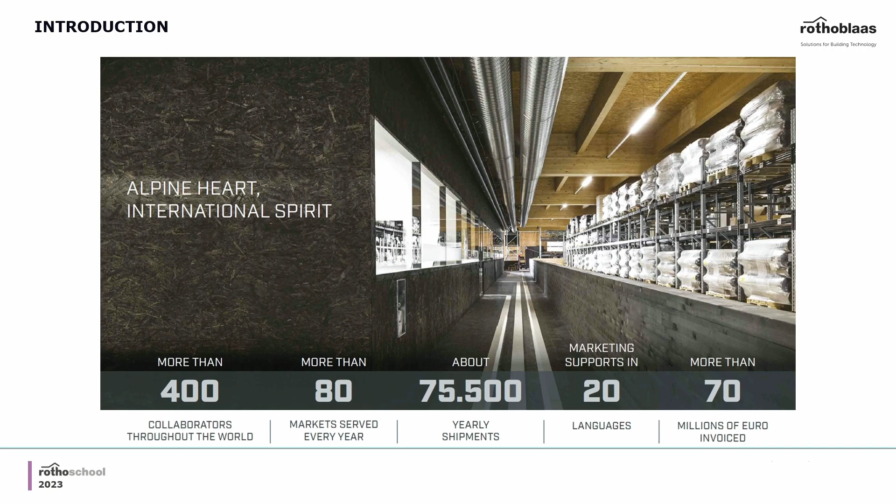As you can see here, we are more than 400 workers in Rothoblaas at the moment. Actually, we are almost 500 as we speak, because we keep on growing and growing. And as you can see here, but we're going to discuss more in detail also in the video lessons, this particular mass timber structure here, we just recently finished the construction of this massive and very nice automatic mass timber warehouse that we have here in our headquarters of Rothoblaas. And this will, and actually has already doubled the existing warehouse space that we have in Rothoblaas.

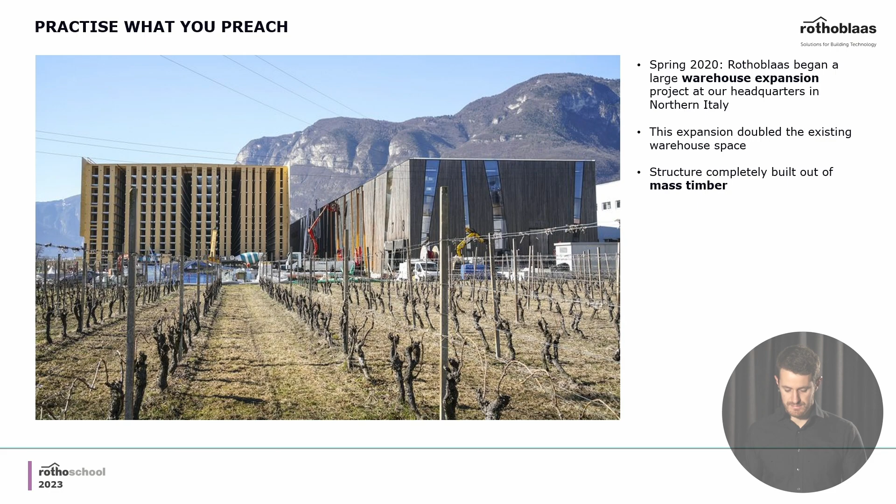So for us, it's practice what you preach. We preach with our Rothoschools around the world to use timber, and also for our own project, we use timber. The use of wood and of timber structure, of course, for us is very important for, as you all know, a sustainability point of view, very, very important. And this is why we preach also the use of this kind of material, structural material in this sense.

But of course, as you all know, timber is a material that a lot of people are passionate about, and myself, I'm the first one to be passionate about it. And second of all, it has a lot of very, very good structural characteristics that we'll see throughout the video lessons. And this is why a lot of people love timber, not only because of its beauty, but also because of sustainability and great performance, really.

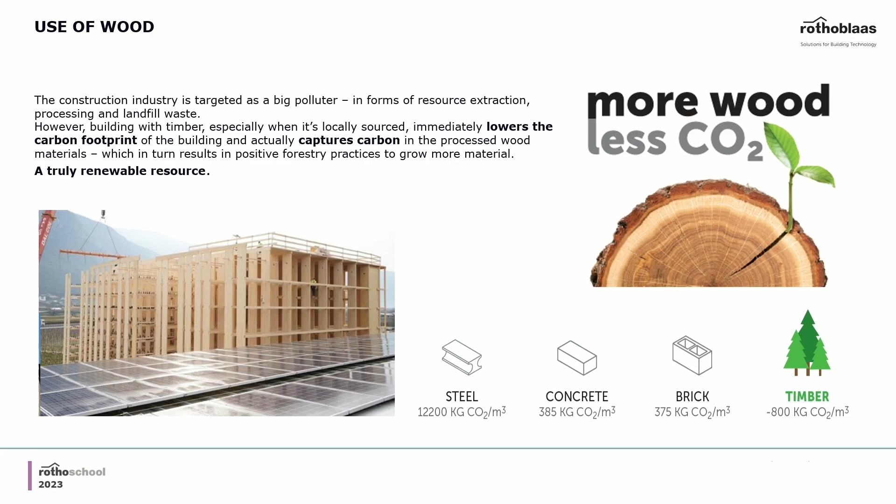What are these video lessons that we're going to do this year? There are 9 of them, actually. We start with the potential of CLT and mass timber, actually. Then we'll go for durability of timber structure and corrosion resistance for outdoor solutions, waterproofing and airtightness of timber structures, the acoustic in timber constructions, the fire design in timber structures, the seismic design, the composite structure or hybrid structure, a very hot topic nowadays to optimize the use of timber, the innovative connections for timber structures, and last but not least, the installation of fall arrest system.

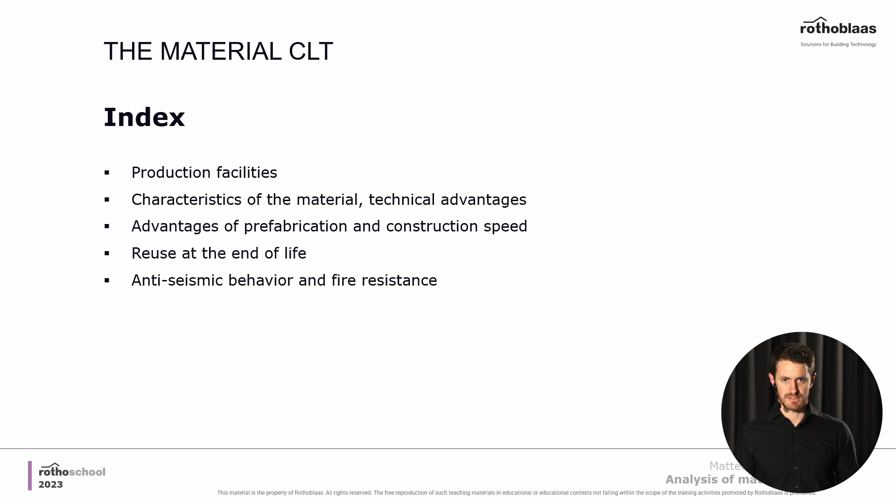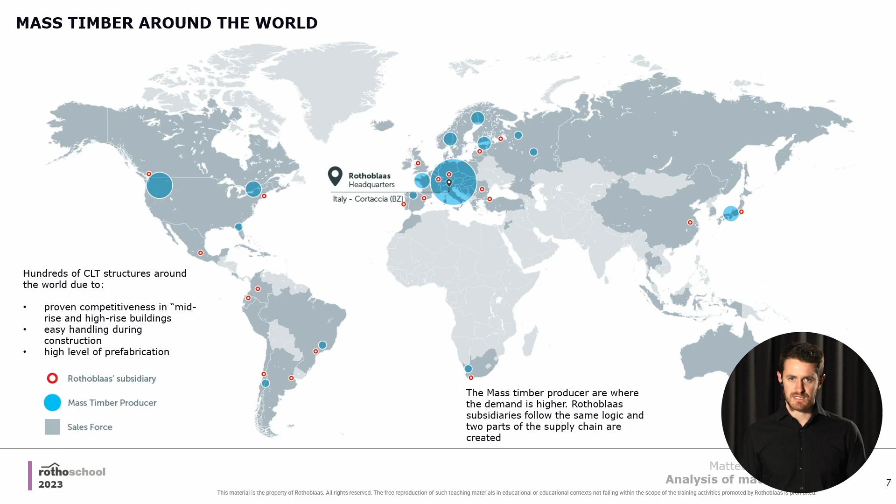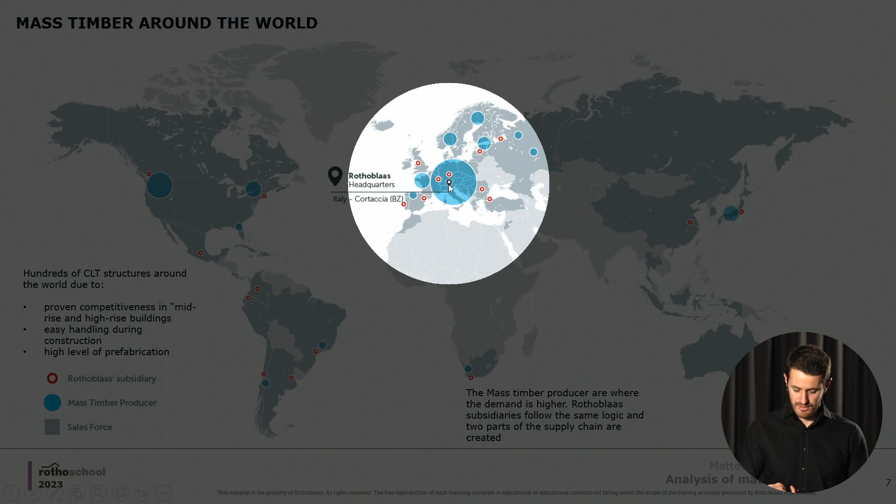First, as an introduction, you see where the mass timber producers are located around the world. The blue dots you see here are the CLT producers around the world. The little red dots are the subsidiaries of Rothoblaas. You see, of course, where I'm talking to you from at the moment, right here in the north of Italy - that's where the headquarters of Rothoblaas is. As you can see in the map, all of the subsidiaries of Rothoblaas are located very close to the CLT producers, which makes sense for both the producers and Rothoblaas, because we work together a lot.

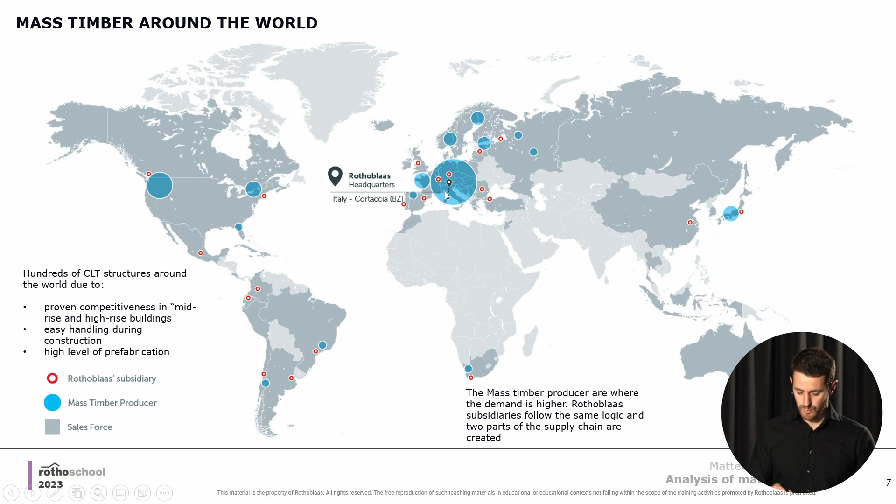You see from the map that one of the most important places where CLT was actually invented is Austria, north of Italy, Germany, Slovenia - all of the region I'm pointing to right now. So this is where a lot of know-how is located worldwide.

You see from this map here, and this is really the first advantage we will study together today, that timber structures are very lightweight. This will come in very handy for seismic actions, as we'll see throughout the presentation, but in particular it's very important because lightweight material means you can move it around and transport it quite easily. In fact, you see here all of the main directions of export and import of this material.

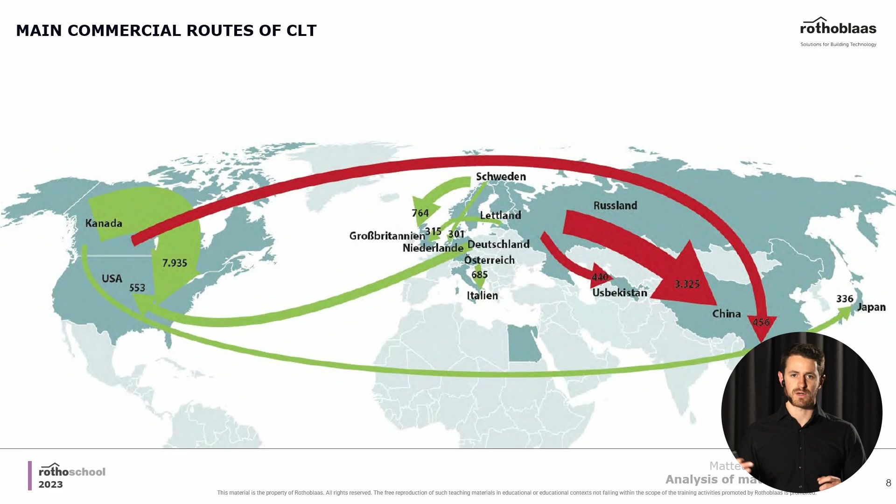It's very common nowadays that we design and produce timber structures here in the north of Italy, for example, and export them to the USA or to Australia or very faraway countries. This is something you can easily do with timber - you just place the panels into a container, ship it, and install it on the other side of the world. Another very important thing is the one you see in this slide right here.

You see in percentage what is the growth of use of every construction material. Timber, the red one, has increased so much after 2020. So it's a material that is more and more common, and studying it and knowing how to build with it is a great advantage, since we are planning to have still another increase in the following years.

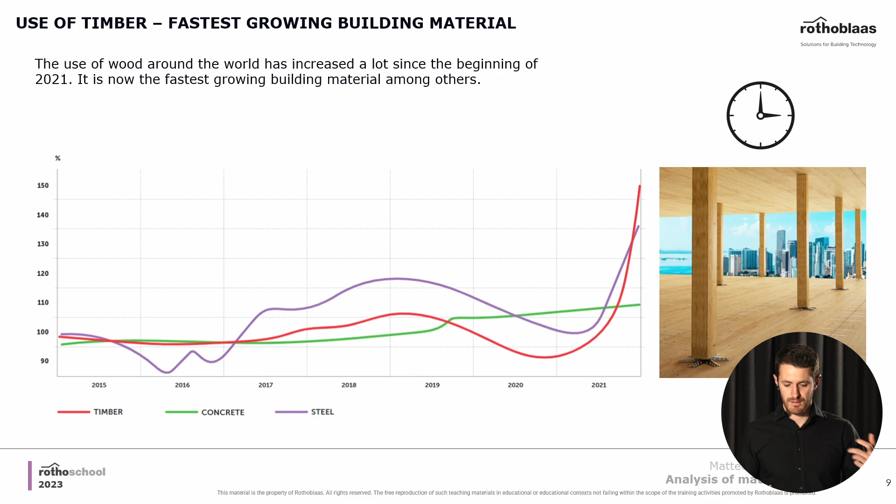Of course, other construction materials have grown a lot too, like steel, for example. Concrete is still growing, not so much, not exponentially like the others, but since a lot of foundations, even for timber buildings and steel constructions, are in concrete, it makes sense that all of them are actually following the same path, growing.

Another very good advantage you have with timber in general, not only mass timber in particular, is the possibility to prefabricate your buildings. Prefabrication means a few things: first, you can optimize your work. Second, you are very precise on site, and precision means you're not losing time or money on the construction site. Third, you can potentially produce these elements with a lower cost and higher precision - so you increase the quality and decrease the price.

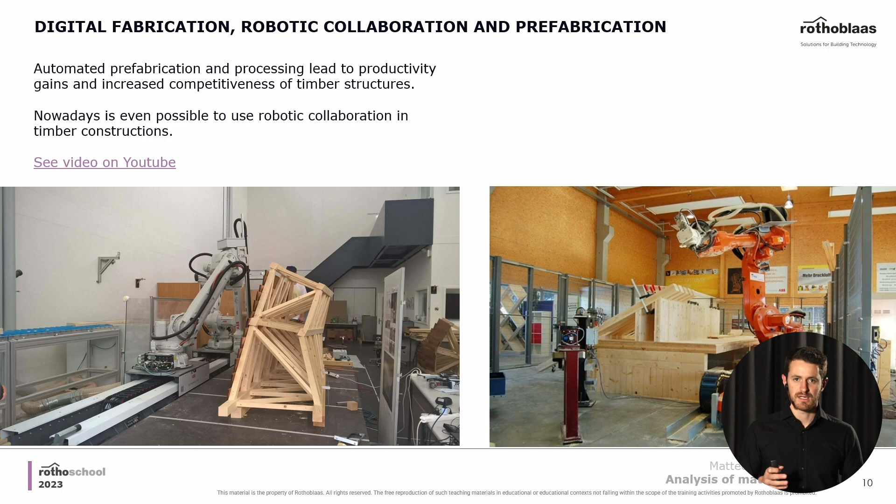So you see the robots in the image - this is something we'll definitely see in the future. But nowadays already, the machinery we're using to produce these amazing CLT structures includes already some advanced robots. They don't have arms and stuff like that, but they are still pretty advanced pieces of equipment. In the future, it's going to be possible to completely assemble a structure in the production facility thanks to these robots.

But even before talking about other advantages, how does the CLT panel work in general? From a technical point of view, it's easy to understand why CLT is called like that - it means cross-laminated timber.

As you can see from the image, it has layers in different directions. The most important thing is that the first layer is placed 90 degrees compared to the second one. With 90 degrees, I mean the angle between the grain direction, between one layer and the following one.

Why is this actually an advantage? One important thing is that if you compare a glulam floor, because you can use glulam as well laid down on the side, and a CLT floor, you can already see some of the main characteristics of these materials. Of course, placing elements in two directions gives you some advantages.

These advantages are, for example, that the panel is very stable dimension-wise, so you're not going to have growth perpendicular to the grain, because timber changes its dimension with changes of humidity, and that's one thing you have to consider every time you design with this particular material.

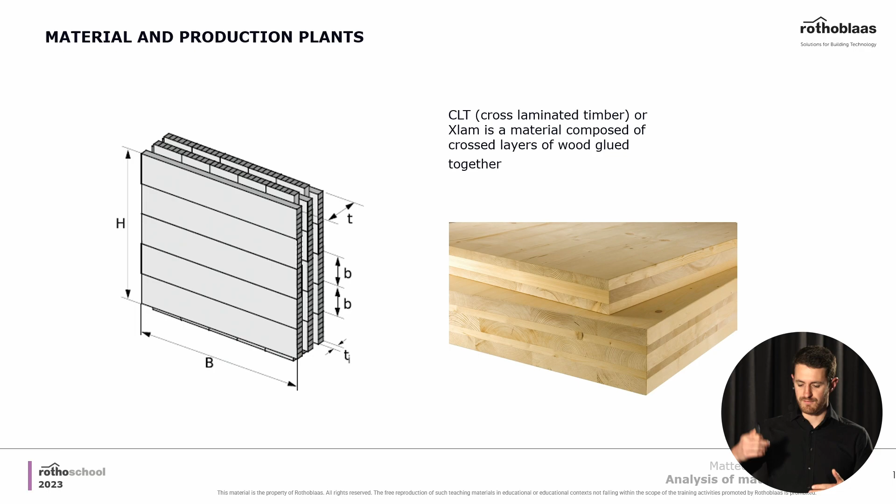You'll understand throughout the presentation why it's important to have resistance for horizontal forces. You will see it.

So where does the timber come from? You see where the cuts from a log are located. Sometimes you need very long boards in order to create a master panel, because the master panel can be quite large, and therefore you need to connect all of these boards together.

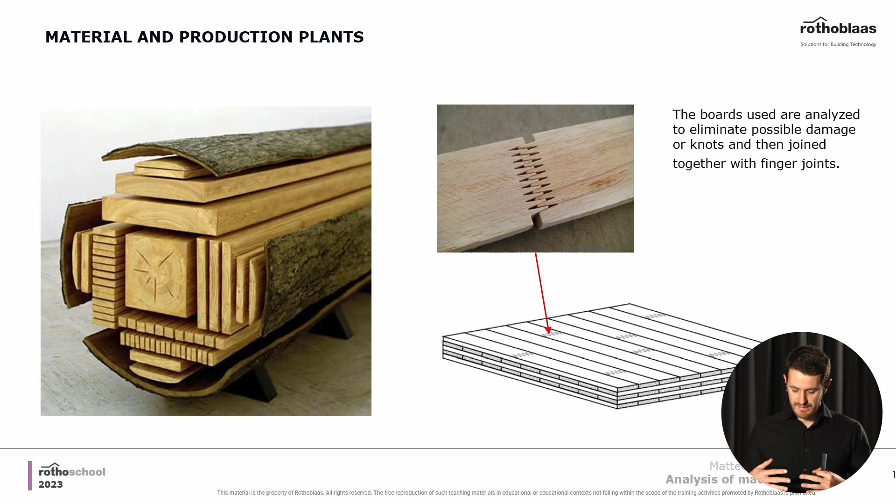And you do that usually with this finger joint. You see that in the image right here, and with glue, of course.

Other advantages - we were talking about this example before - the difference between a glulam laid on the side, that you can see right here. You can see that all of the lamellas here are in the same direction. So this is not CLT, this is simple glulam that you can of course use on the side for a floor panel.

And the difference between this one, the first one, and a CLT panel that you see here on the left, the one I'm pointing to right now - if you just consider the resistance in one direction on the main span, you would actually have more resistance for vertical forces on the glulam.

So your question might be, why then use the CLT panel? First of all, for the advantages we've seen before, the stability and the horizontal resistance, but also another very important thing.

If you use a CLT panel, it would act more as a slab, a panel really, and it would work in two directions. So you would definitely have a main direction on the main span - a main direction means one main resistance - but the panel will also work on the other direction, at 90 degrees to the opposite. So you're spreading the forces around in a better way.

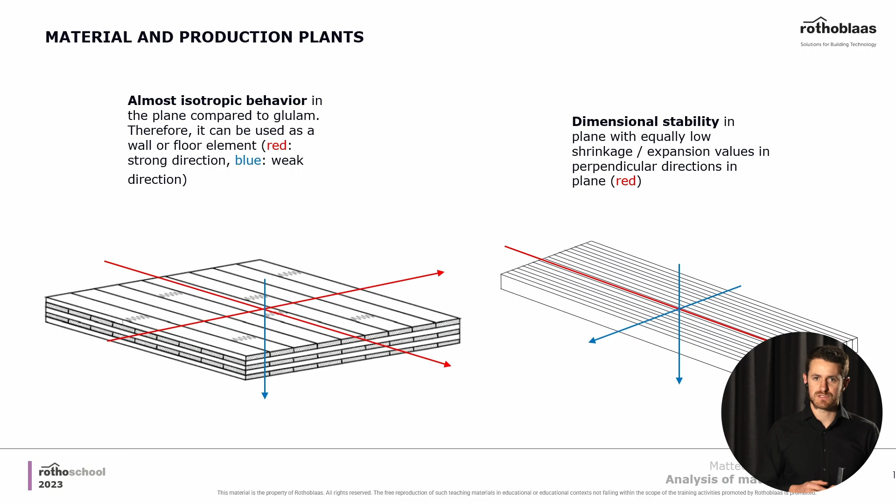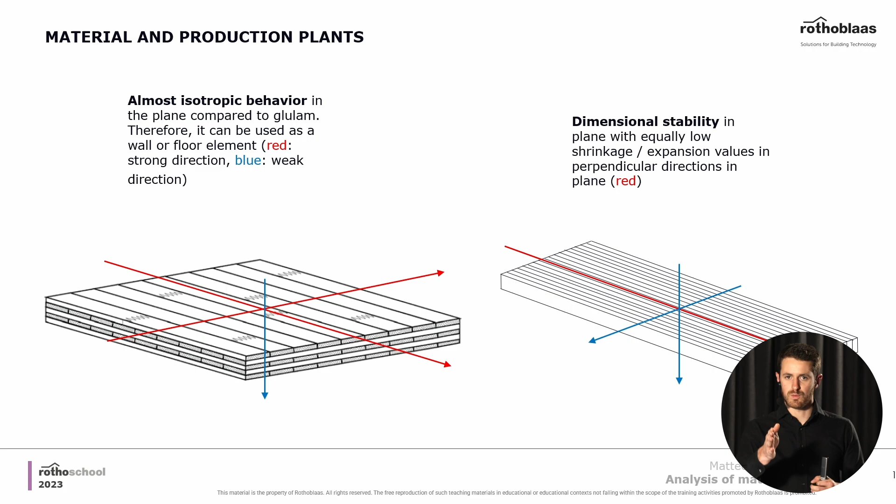If you use glulam, you would have more resistance in that one direction, but you have zero resistance on the other one. So it's working really as a one-dimensional element for the resistance of it.

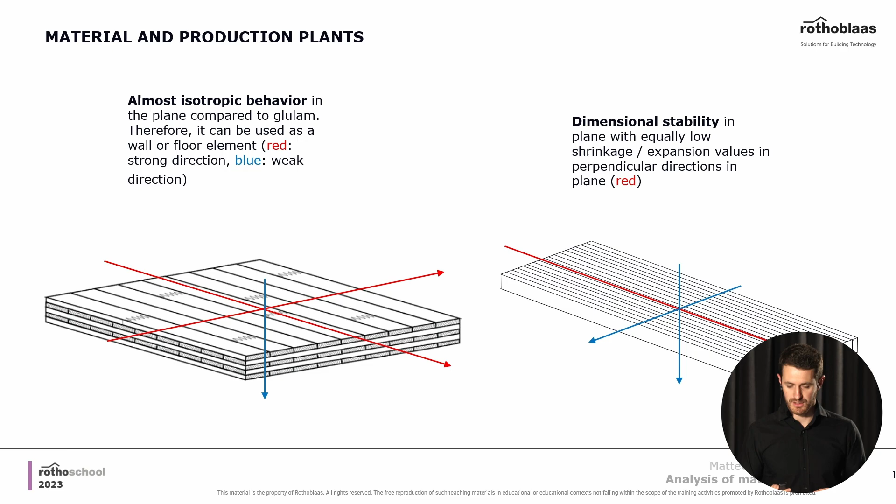Second of all, if you use glulam as a floor construction, you have to make sure that you leave a gap between one panel and the other, to make sure you don't have troubles from the increase in dimension of the panels, because that can happen with an increase of humidity in the air.

Another very important thing are the minimum distances. Minimum distances for timber are very, very important, and we'll do a webinar specifically for connections where you'll see it in detail. In general, the minimum distances though are lower for CLT.

This is because you have grain in two directions, and therefore you have less chance of splitting in the timber, because the other layer is holding the previous one attached. So it's an automatic reinforcement, each layer having those two directions.

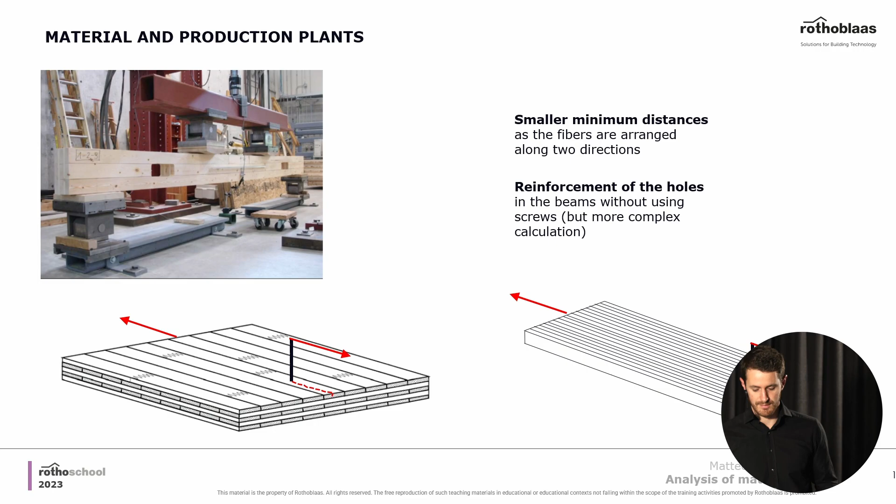On the other hand, for glulam, one of the issues you might end up with, if you don't calculate the minimum distance correctly, is ending up with splitting of the timber. That happens if you don't leave the right minimum distance to the end grain in the glulam in this case.

A disadvantage of CLT - but this one can also be seen as an advantage, and you'll understand why - is that the raw material is of quite low quality.

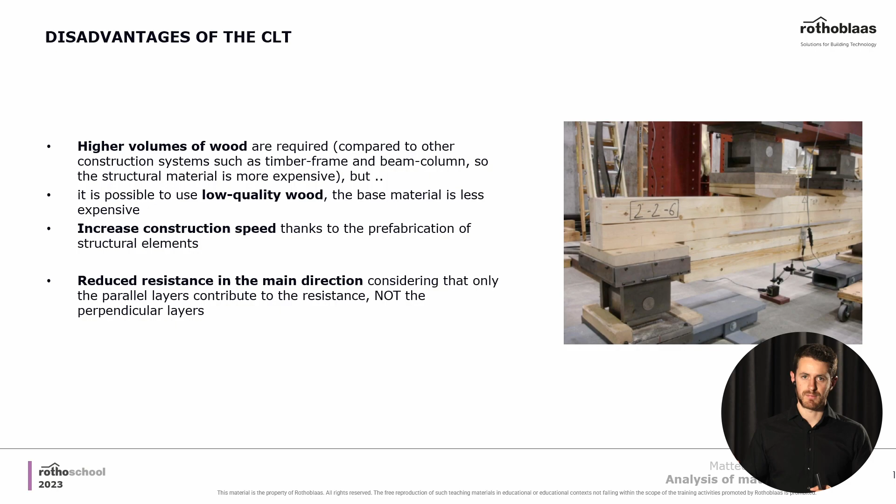Having low quality raw material means that it's not planed, the boards are just rough boards, as you have them after sawing them. This means the material is quite inexpensive, and at the same time you can even use different grades, structural grades of timber on different layers in the CLT panel. You can place the lower grade timber in the central layers, so that you can save some money and not waste so much resistance in your panel.

You can see here exactly what I mean. Usually these rough boards are roughly 4 meters of length, and of course the master panels can even be 12.5, 13 meters of length. So you have to connect, as we said before, with finger joints all of these panels.

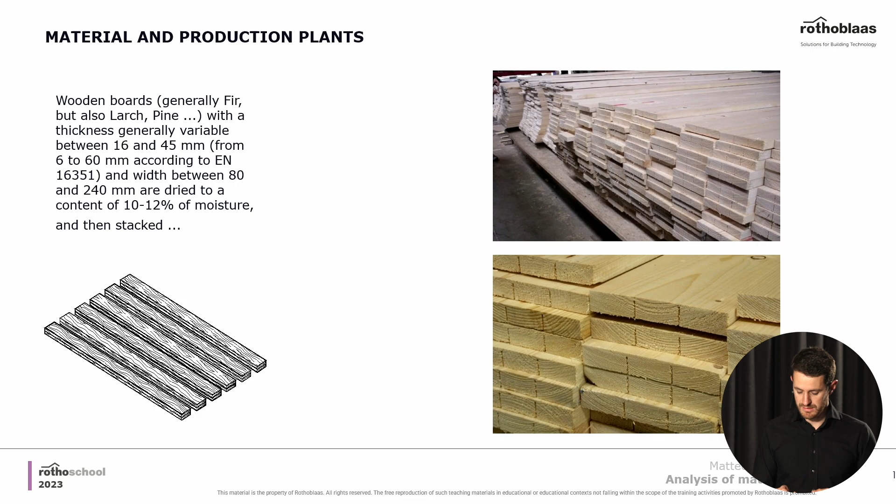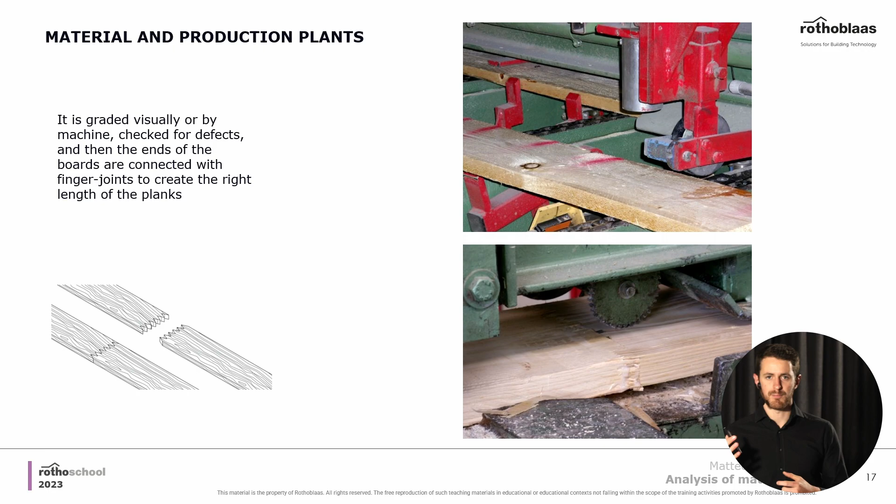One important thing is that there is a machine before the board goes into the panel itself that is cutting out all of the issues in the boards. With issues I mean, for example, cracks, or the knots where the branches of the trees are. These are usually signed by a worker, and the machine cuts away these problems automatically where it sees the red lines, and reconnects the board with the finger joints. This is in order to achieve a better resistance of the timber.

Once you have all the boards ready of the right length, as you see here, this is what I mean with master panel, the big piece of CLT from where you cut all of your little panels. Of course, you have to glue everything together.

The glue is very important because the selection of glue actually changes depending on the thickness of your CLT panel. If you have a very thick panel, you need a longer drying time for the glue, and therefore a different glue. If you have a very small one, the drying time can also be quite quick.

As a producer, you can decide if you want to glue your boards only on the main side of the boards, or if you want to glue together also the edges of the boards. This changes slightly the resistance of the panel, but mainly it changes the look of the panel on the outside. So it's your choice.

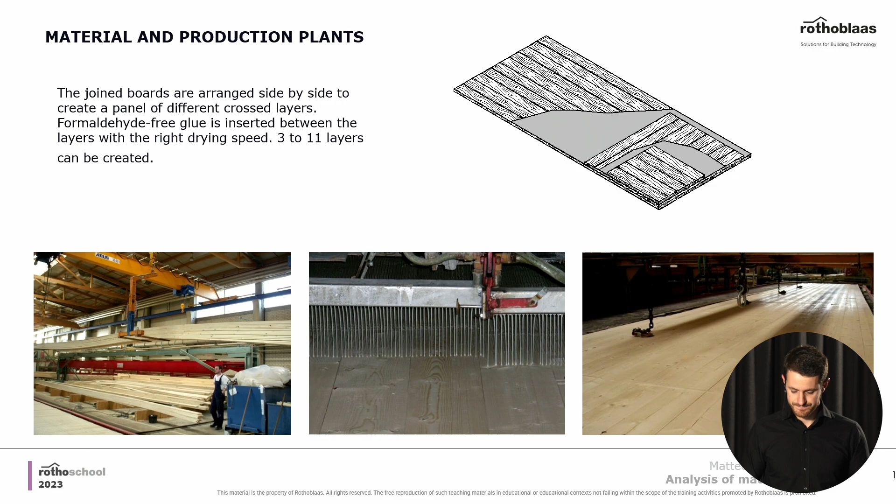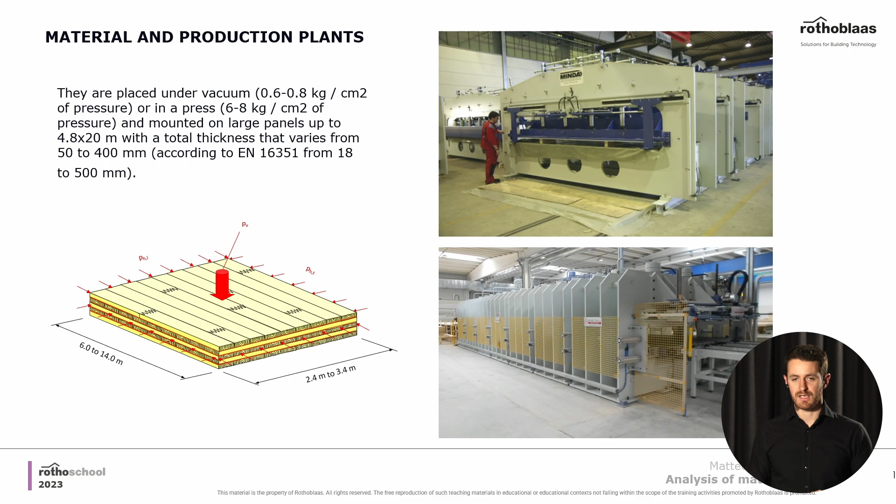They are left usually for something like 13 minutes or more in this press, depending again on the thickness. Once the panel comes out of the press, the master panel, as we said before, you can finally do the nesting.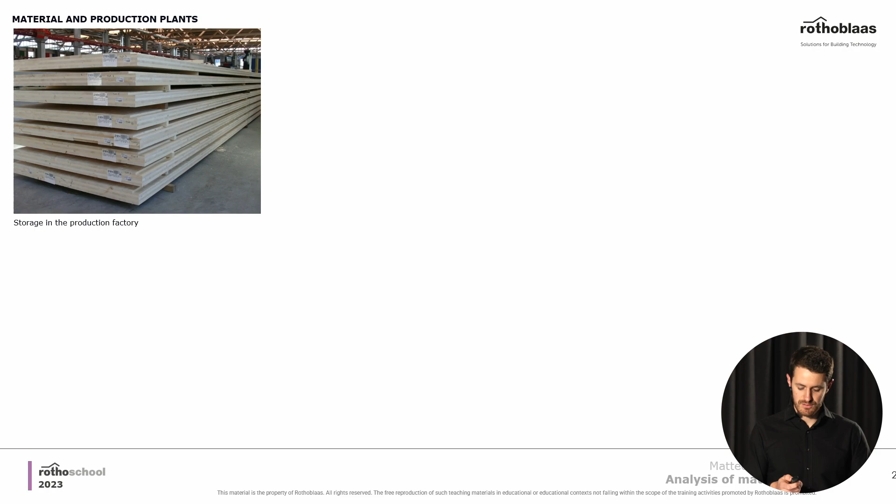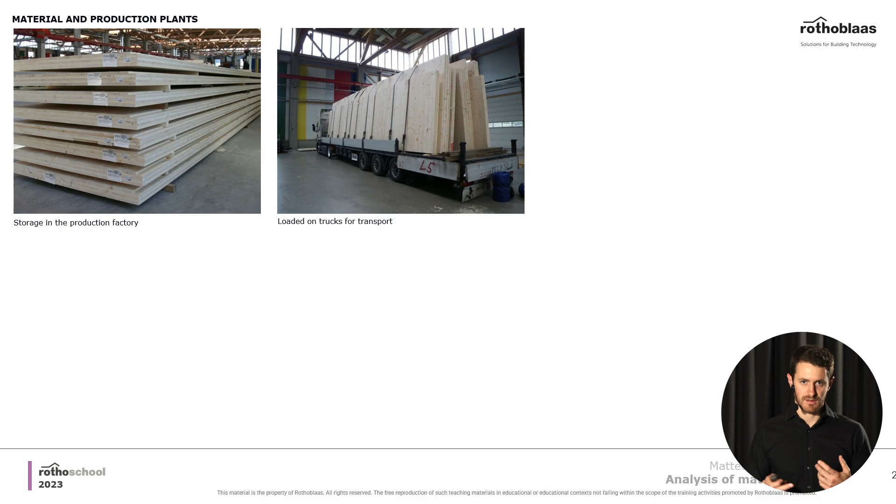Of course, you can also place them vertically. You see here a picture of the panels placed vertically on a truck. This is again a choice of the designer. If you have panels of the right dimension to place them horizontally on a truck, that's a more optimized way to do it. Otherwise, you can decide to place them vertically on a truck, but you have to consider more cost of transport because you are not optimizing your transport as much.

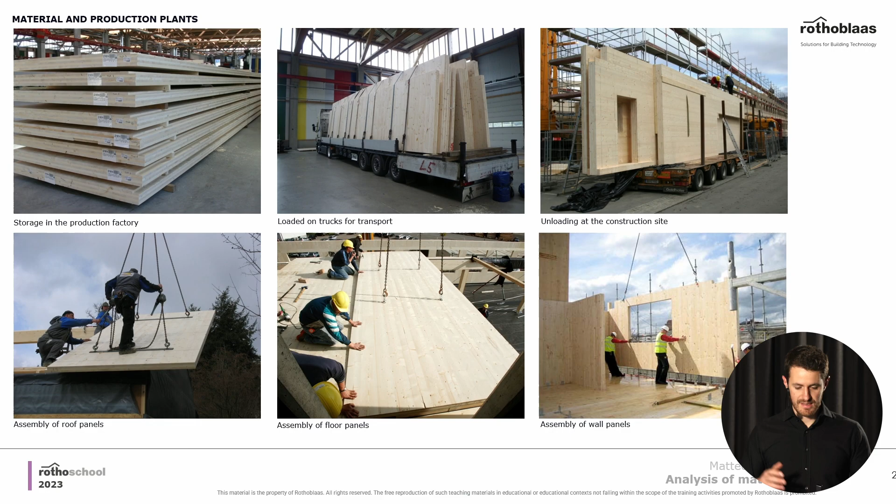We'll have another part where we talk about lifting the panels, but here you can see some of the methods you have to lift up a panel, like a roof panel, a floor panel, or a simple wall. There are many ways to do it, actually.

We can see here how a CLT structure works. As we said before, you always have in your panel one main direction, resistance-wise, and the other direction that still works but has the least resistance. So it's very important to locate and place the panels in the right way.

Timber has its greatest resistance in compression parallel to the grain. The compression strength you have perpendicular to the grain is roughly a tenth of the resistance you have parallel to the grain.

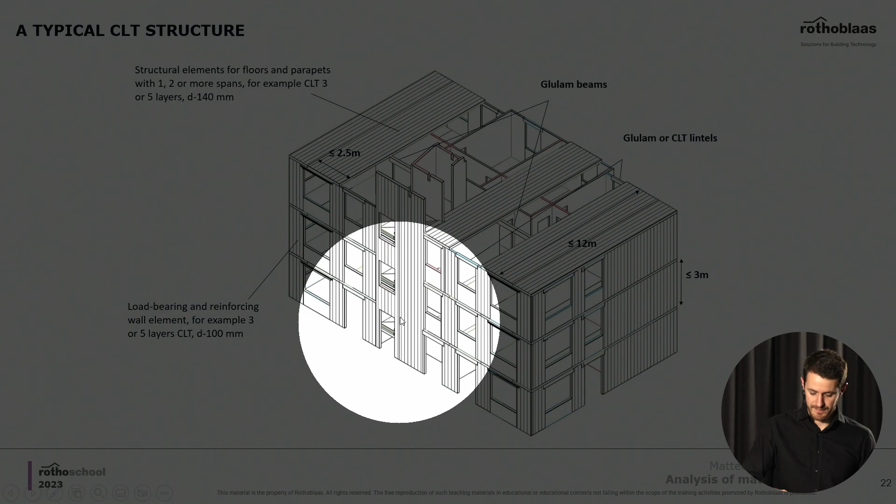This is important, because when you're designing and placing a timber wall panel, you want to have the main resistance which is vertical. In fact, in the picture here, you see that the outside layers are placed vertical.

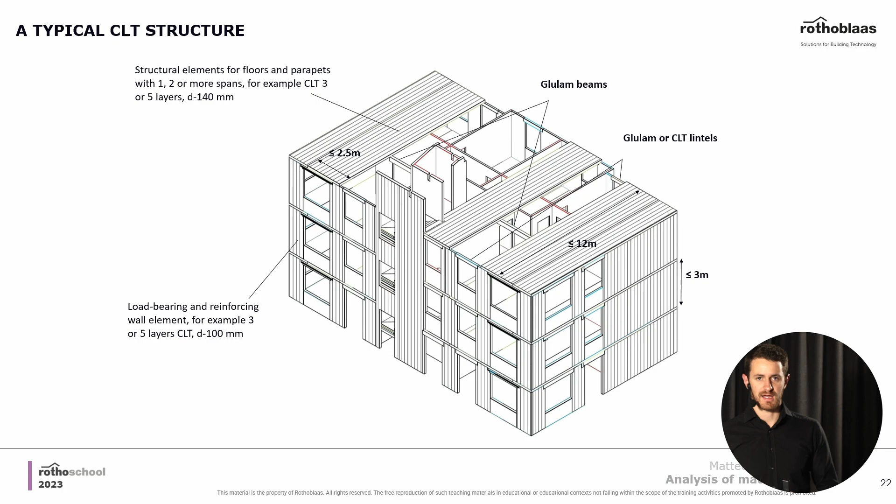If you're placing a floor panel, the main resistance needs to be parallel to the main span, and that's one way to place it. In general, this is for roof panels or floor panels, where the main resistance should be — and that changes the way you're calculating your panel.

Pay attention if you have a roof panel like that with a cantilever on both sides. Since our panel has a different resistance on the two axes, you have to do two calculations in order to verify the two cantilevered parts.

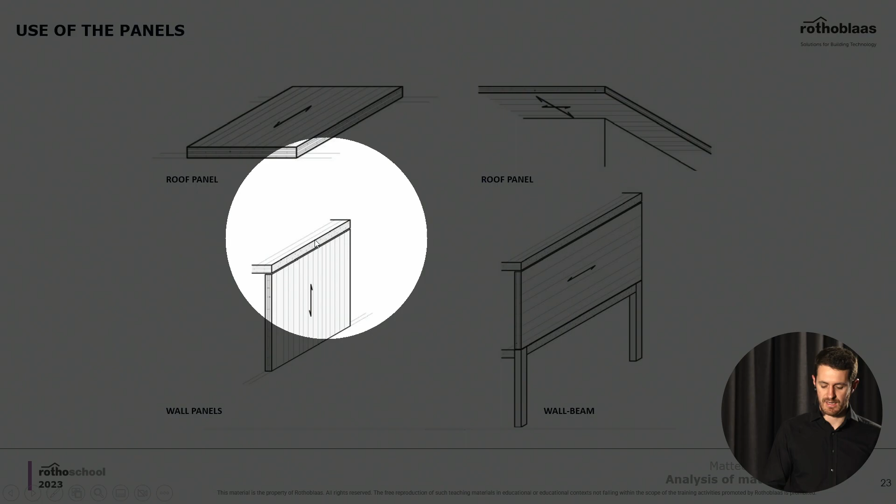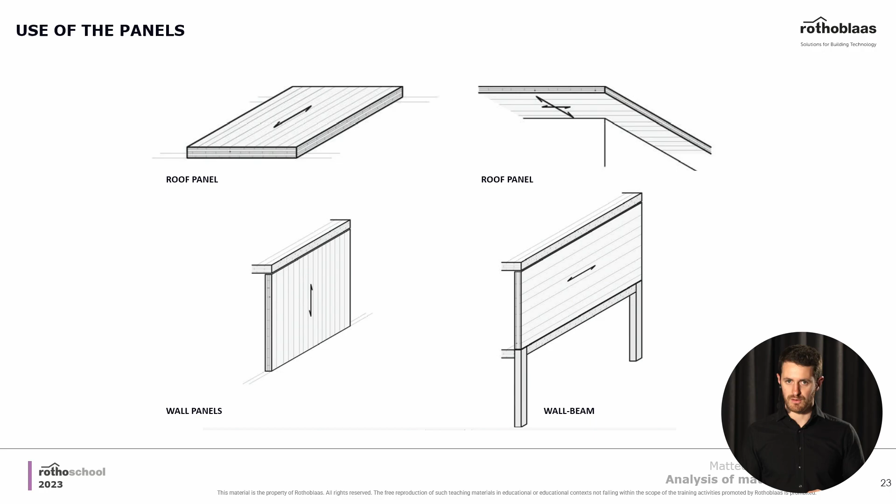Just to give you some numbers: the highest timber building we have in Italy is in Milan. It has 9 stories, and one full floor was finished completely in 1 week. So in 9 weeks, they finished the whole thing. That's actually a very stunning result.

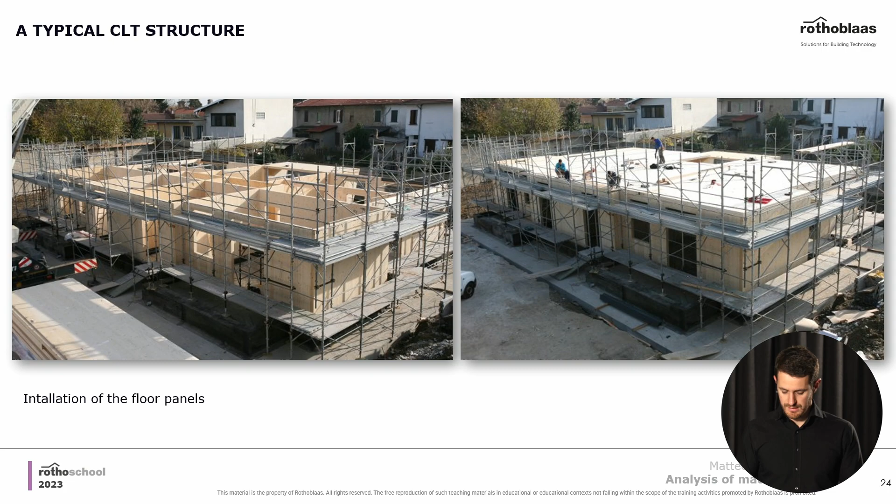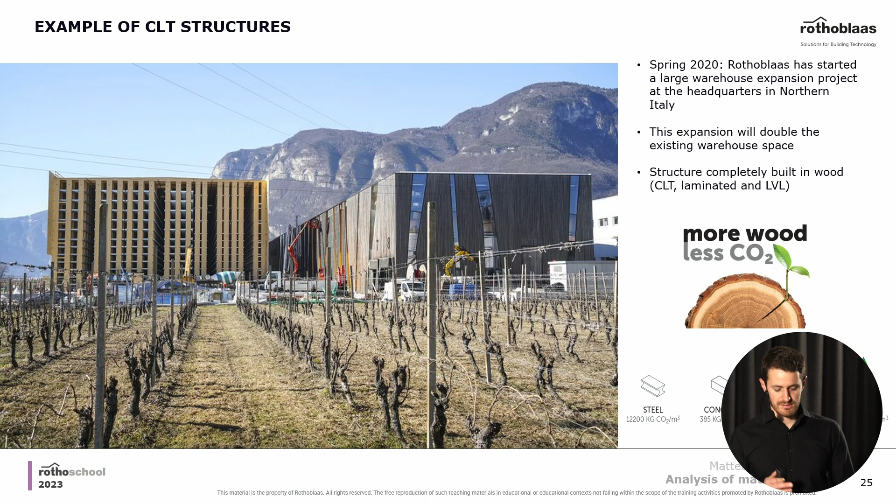You can see the construction phases of it. This one is massive, with more than 3,500 cubic meters of glue laminate, even more CLT in it, and it was built in just 7 weeks. You'll see some other pictures of the building.

In this case we had 2 teams of workers working together. The first team, again of 3 people, was pre-assembling the big pieces of these columns connected together. The second team, also 3 people, were installing these pre-assembled pieces on site.

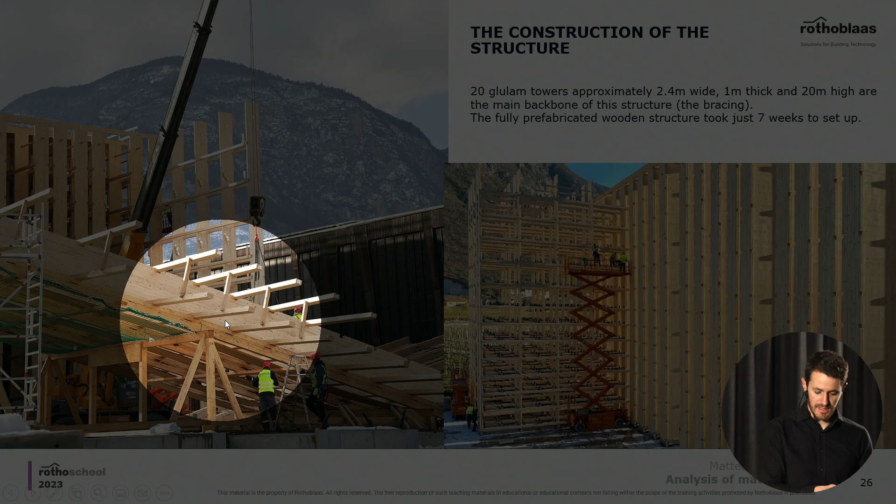This is how they managed to build this very big construction in only 7 weeks, which is again stunning, having very low tolerances. In fact, with these methods, they were sure the distance between one column and the other was correct, because it was all laid out on this structural element.

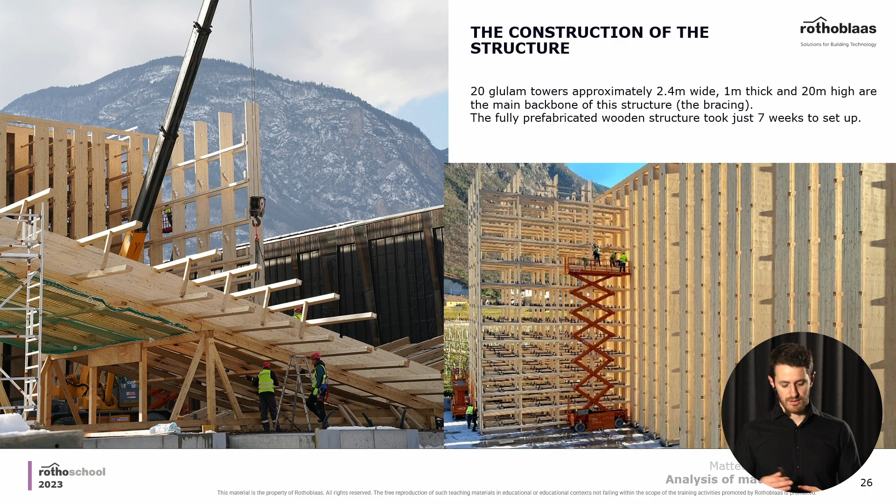And so there was no human error, and they could really do all the connections almost horizontally, being very, very quick. And of course, having two teams helped as well, being very fast on site.

You see here some other details of the connections. All of the connections were hidden. In fact, you can see here some of the plates, in particular the entry of the goods. All of the connections were hidden, and this is very beautiful to see, but that was not actually the main purpose for hiding the connection like that.

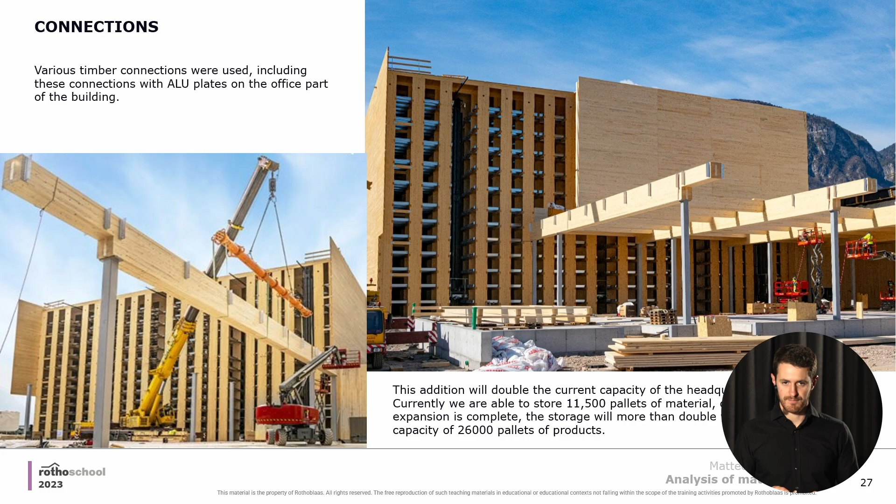The main purpose was the fire resistance of the structure. Of course, if you're hiding completely a connection, you end up protecting the steel part with the timber. And we'll understand why timber has such great characteristics and resistance to fire, even if it sounds sometimes weird, because it's a combustible material at the same time.

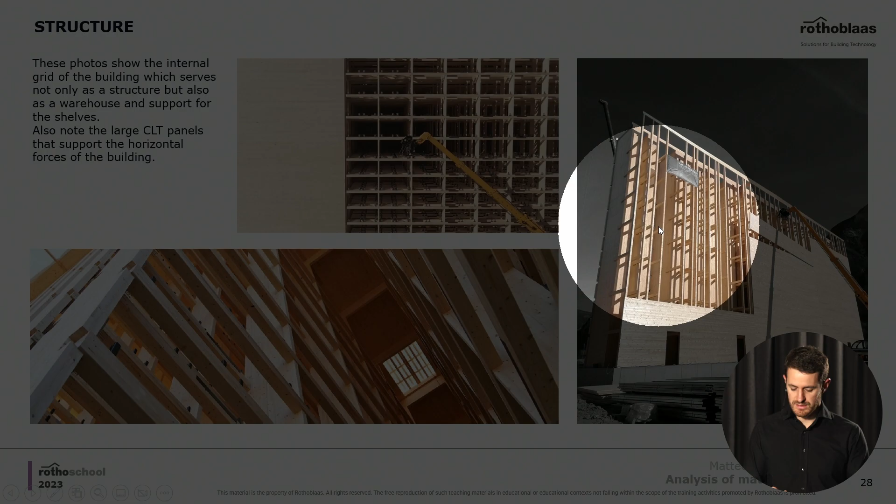You see some other pictures of the structure. You see how the CLT panels here were used as a bracing system for the structure. They were not the only bracing system, actually. In fact, you can see again here these 20 big CLT and glulam towers, with actually some LVL elements in them as well, that were used as bracing systems for all of the other columns laid down there.

Of course, on one side, all of these columns were connected between each other and braced with those big columns. On the other side, it was not possible to connect all of these timber columns together, and therefore it was harder to brace the whole system. So what was the thought of the designers of this particular structure? Of course, the thought was connecting down all of these columns with a bending moment resistant connection.

And in here you can see exactly what I mean with that. In this connection, we had two very long threaded bars on each side, creating the bending moment resistance, and a lot of LBS screws, little screws for plates provided by Rothoblaas, for the shear resistance.

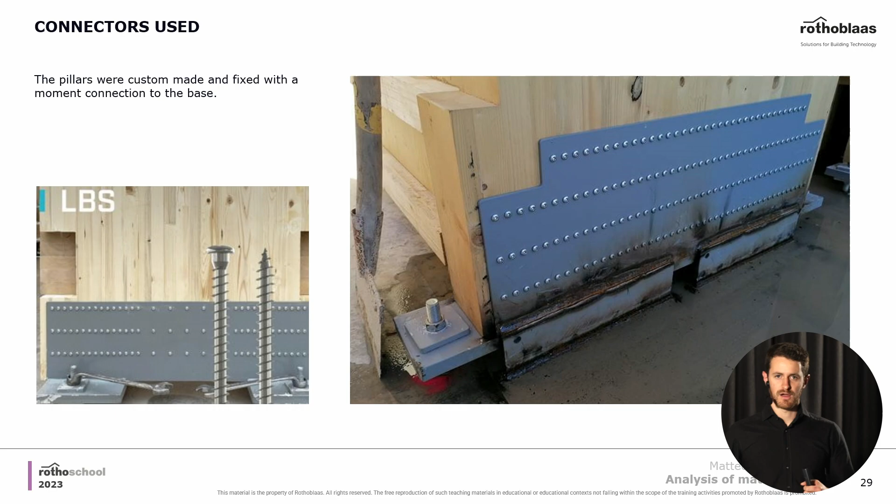Of course, another important thing, and we discussed it as well together in the first part of this presentation, is the seismic behavior of timber structures. The main characteristic that makes them so good in seismic areas is, of course, the lightweight of the material itself.

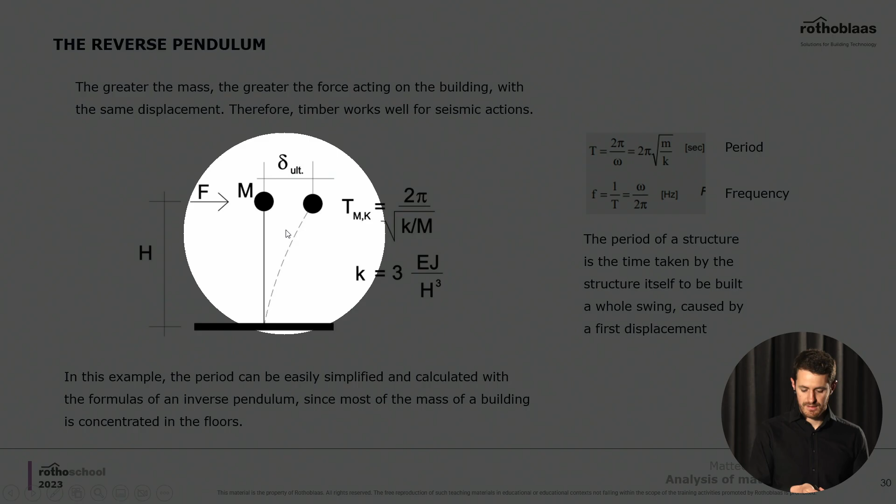So you can see that a timber structure, a structure in general, actually can resemble an inverted pendulum. And of course, the more mass you have on top of this inverted pendulum, the more seismic forces you would end up having. So it's very simple: if you reduce the mass of your structure, you reduce at the same time the seismic forces. So this is one way to optimize your seismic resistance, of course.

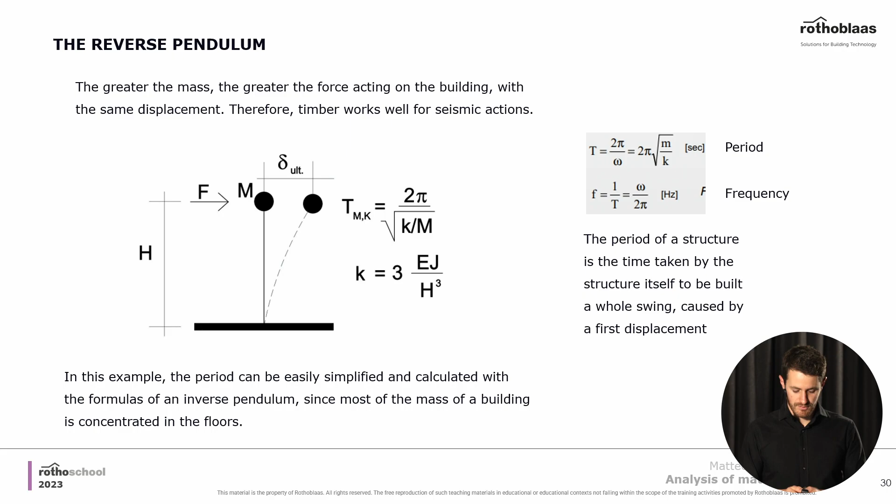It was stunning to see how well this structure survived with no damage at all to the structural members. The only damage that you could see after 14 consecutive tests was to the connections.

And do you think this is because the connections were of poor quality? Not at all, actually. This is because this is exactly where you want to have your failure modes for seismic actions, because, of course, the steel connections and steel connectors are the ones with the most ductility. But we'll see more of this when we talk in more detail about seismic actions and seismic resistance.

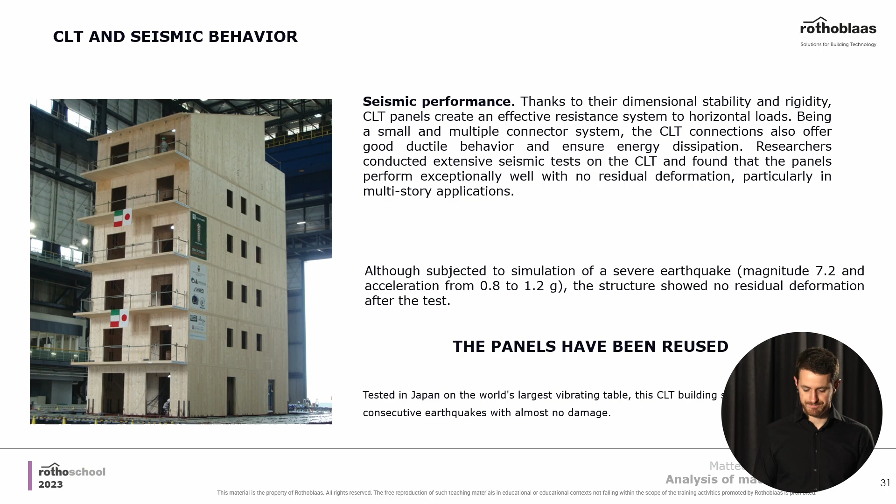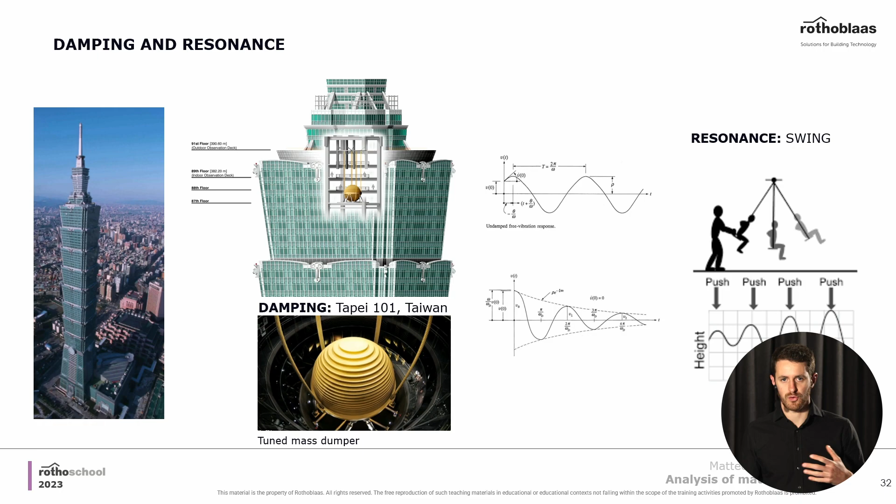This is another interesting example of a tuned mass damper, but of course we said that the way to dissipate the seismic energy is with the ductility of the connections. Actually, this is how it's done usually with timber.

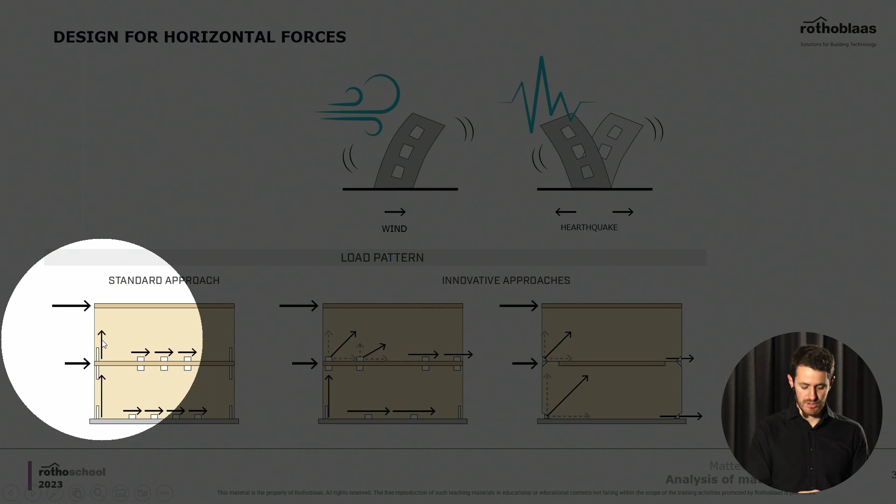Last but not least is what is a shear wall. A shear wall is the bracing system of our CLT structure, and you can see here that it can be connected in different ways. There is the standard approach here on the left, in which you have one hold down at both ends of my panel. This is the one supporting the tension forces, and you have in the central part some other fasteners and connectors supporting the shear loads of the panel, of course.

And you see how the same layout is used throughout all the shear walls, down to the foundation, really.

It's very important that the shear walls are continuous to the foundation, because what they have to do is bring down all the forces and bring it down to the foundation.

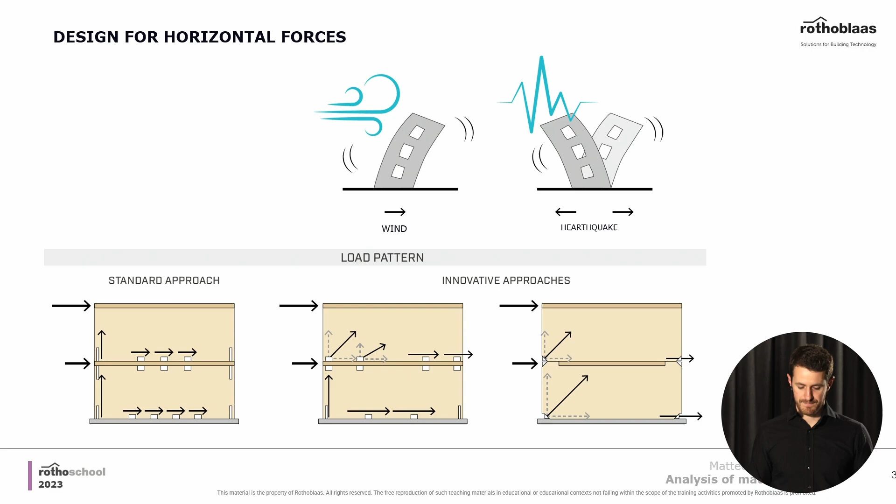There are also other approaches, such as placing hold downs that at the same time can resist the shear forces, so that you can use the same connector all over your building. That's definitely an advantage.

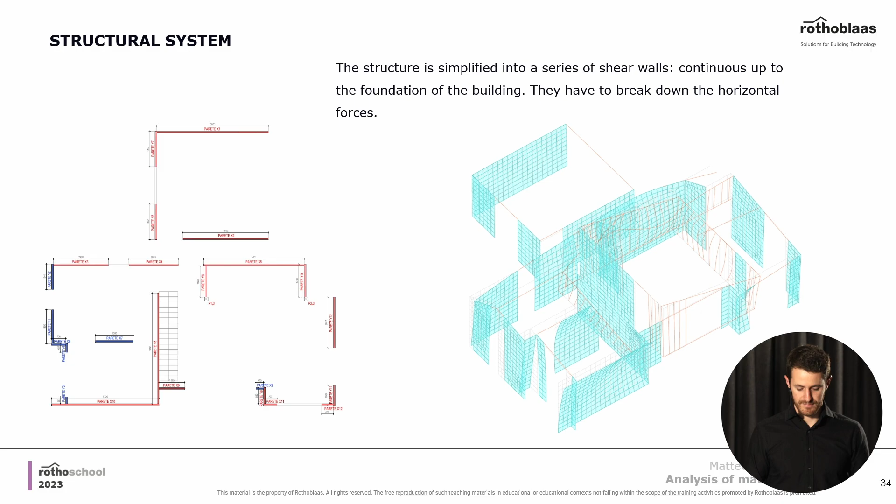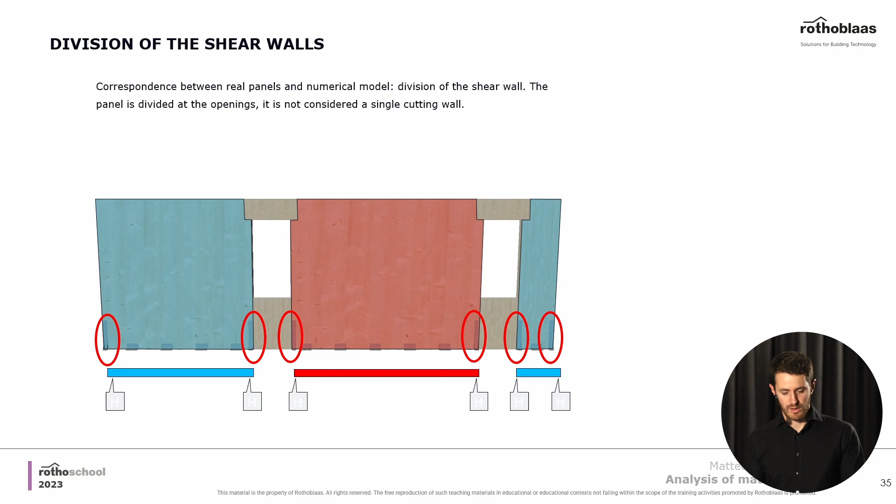You can see here an example of a design of a CLT building, and it's very important to always draw and design your shear walls so you're sure you have enough of them on both axes. Other examples: if you have a big wall with openings, you can decide if you want to split it into more than one shear wall, or consider the whole thing as a single shear wall.

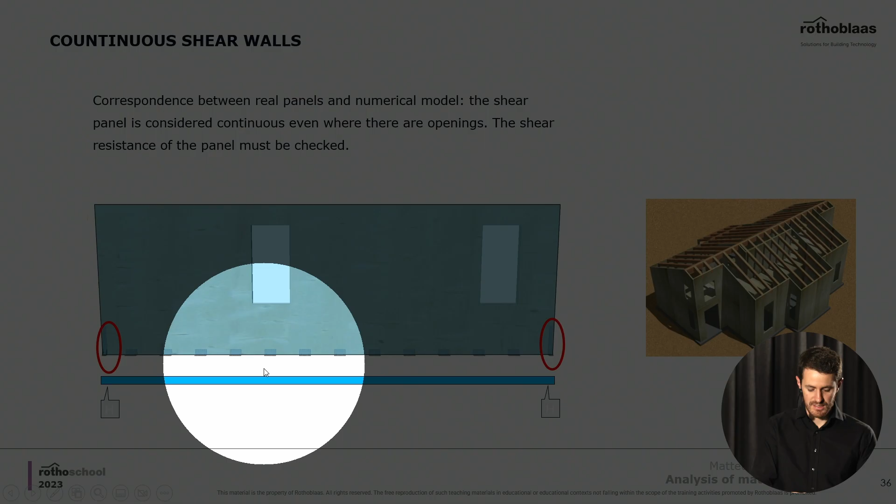In order to do that, you have to make sure that the resistance of the net section that you have right here is enough. Otherwise, you cannot do it.

We said already that timber is a great material. It has some great properties because it's super resistant and super lightweight at the same time, so the ratio of weight to resistance is actually great, comparable to that of steel. But it has one disadvantage - actually, it's not a disadvantage if you consider it the right way when you design your building.

It is a brittle material. So what does it mean, brittle? Brittle is the opposite of ductile. Ductile means that you can bend it in a plastic way without having a failure - a failure like a breaking of the element.

If you have a brittle material, it can bend in an elastic way. If you go in the forest and take a branch, you can bend it in an elastic way, but after a while, once the elastic part is finished, it will break in a brittle way. It will snap almost immediately without bending in a plastic way.

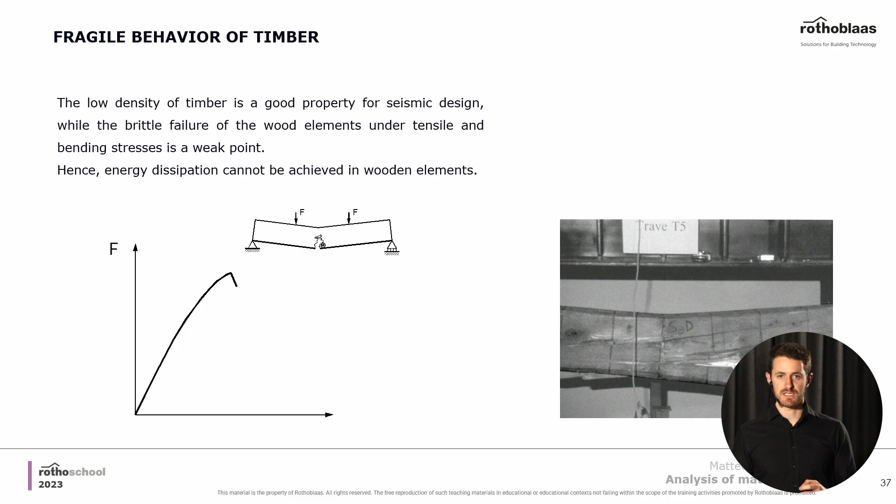So plastic bending is very important to dissipate energy, and this is why we have to rely on the connections made of steel to achieve that ductility. It's always very important to have ductility in our structure, so that if something wrong happens, you can see it before the timber beams fall down onto your head, or you can dissipate the seismic forces if you are in a seismic area.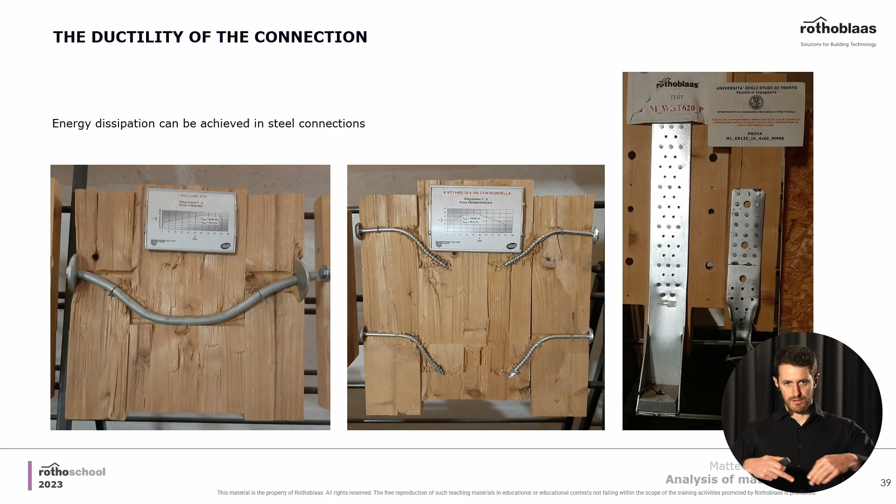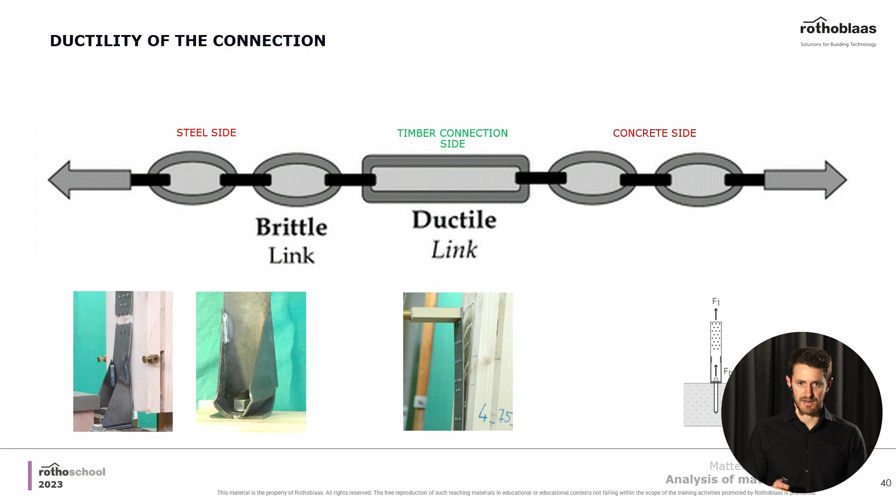Here is exactly what I mean with ductility in the connections, and you can see it even better in these images of tests. You can see how the steel bends in a plastic way, dissipating all of the energy. You always need that ductile link, which is, as we said, our connection. So always have the failure mode in the steel.

One last but not least important point is the last big advantage of timber structures. As we said before, timber is a combustible material, but this does not mean it doesn't also have a very good resistance to fire. How's that? Because timber is, of course, combustible, but it's also a very good insulation material.

And it burns in a constant and very slow way, with a charring speed, a charring rate, which is very slow. This means that it chars at a very slow rate, and most of all, the internal side of the section remains intact and retains all of its structural properties. Of course, the char layer cannot be considered anymore for the resistance of the net section, and we should remove a little layer, usually 7 millimeters, where it's heated up too much and pyrolysis is happening. You cannot consider that little layer, but all of the rest retains all of its structural properties.

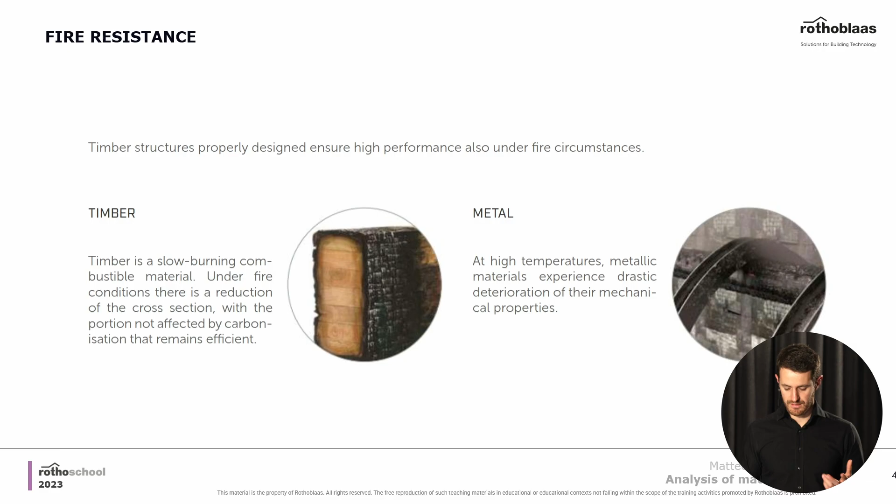On the opposite side, if you do the same thing with a steel section, steel heats up very quickly and very quickly loses completely all of its structural properties. So after roughly 15 minutes, the heated up steel has lost completely all of its structural resistance. It bends down like that.

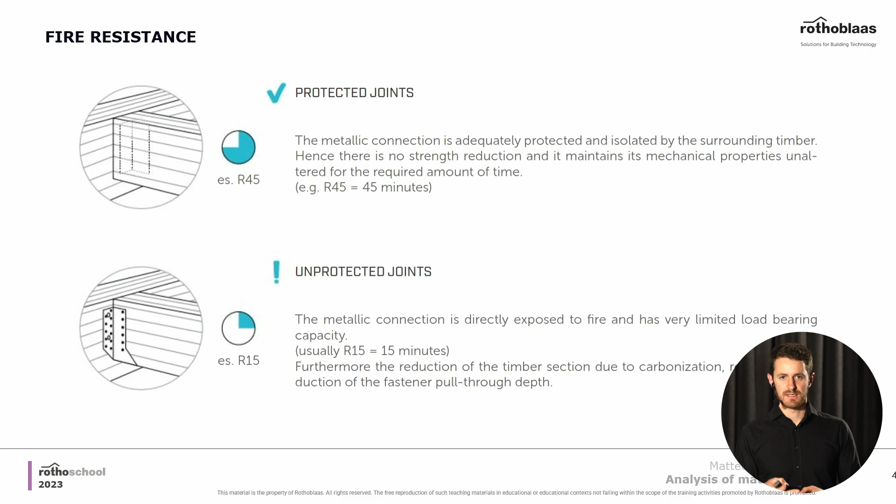So it's very important, as we said before, to protect the connections as well - your steel pieces, your steel fasteners and connectors - with the timber.